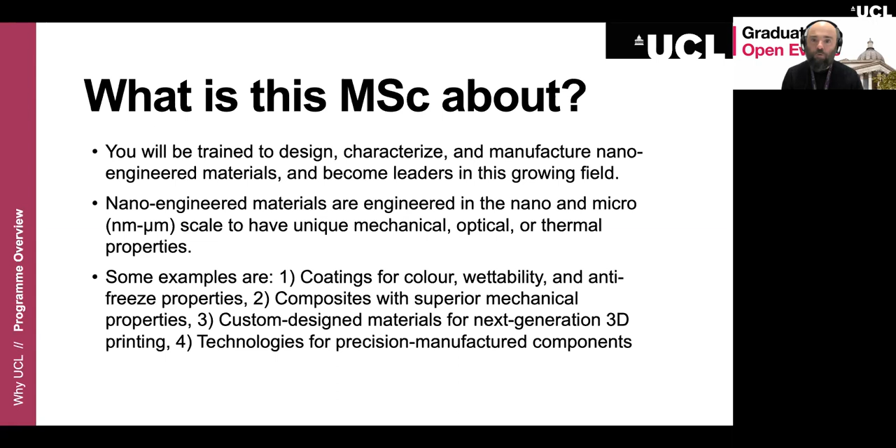To give you some examples focusing your attention on what they are, we will teach you about how to design coatings, for example, for color or wettability or antifreeze properties, anti-fogging properties, and so on. We'll train you to design composite materials with unique mechanical properties, very high strength, very high stiffness, for example. Other things would be custom design materials for 3D printing and additive manufacturing, and technologies for precision manufactured components. So all of these fall within this category of materials that are engineered in the nanoscale.

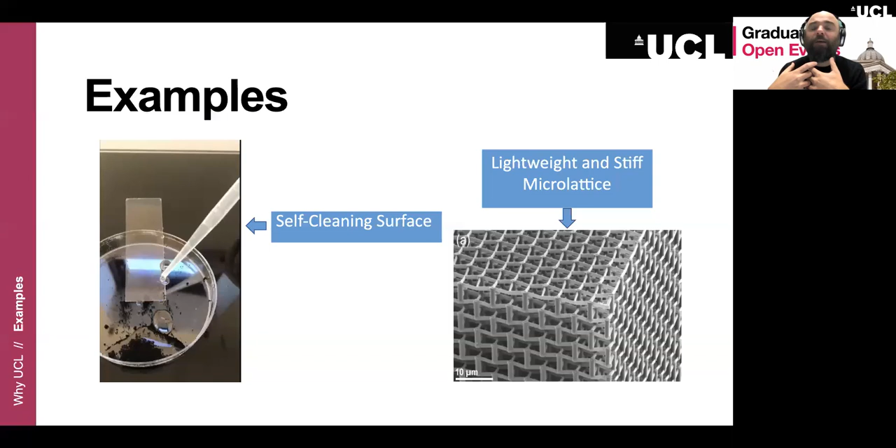The idea is that if you engineer the surface in such a way that you make these micro hills, essentially, you don't make the droplets spread out like this, but you let them be intact and roll. If you imagine this is a dirty surface and the droplets are rain, for example, it's simply a coating that can be applied on walls and all kinds of surfaces so that it can become a self-cleaning surface - it just cleans itself from any type of liquid. So that's one type of material.

On the right-hand side, you see a very small lattice. This is essentially an engineered material where we put the material where it mostly matters. In other words, it's a very tiny bridge, very lightweight - the material is designed to be where it can resist the forces. So essentially, you make a very lightweight and very strong or very stiff material by engineering these features at that very small scale that you see there. So just some examples to make you situate what nano-engineered materials are.

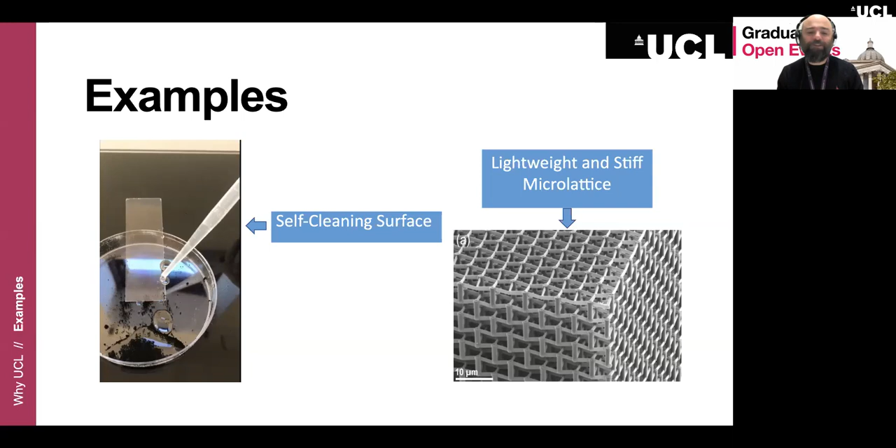And then in term 3, we have the advanced research project. This is term 3 in summer. And here you will be working on, as the title suggests, advanced research projects. I will describe a bit more later on about the types of projects that you will be working on. So that is the structure of the program. Okay, all of this is done in 1 year.

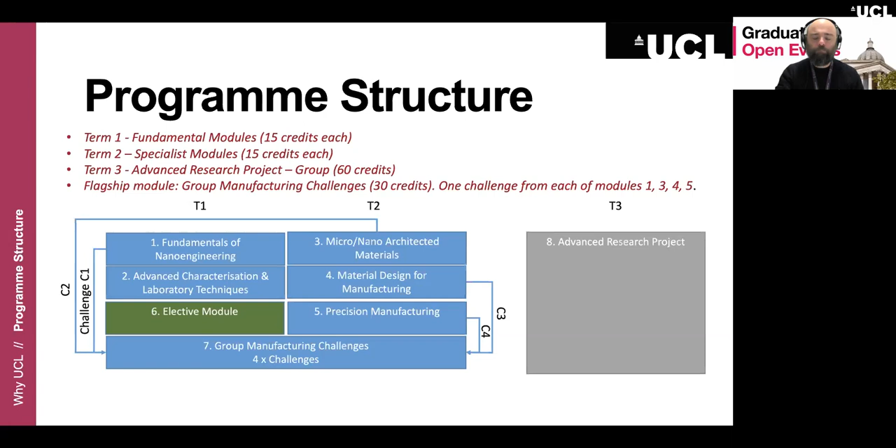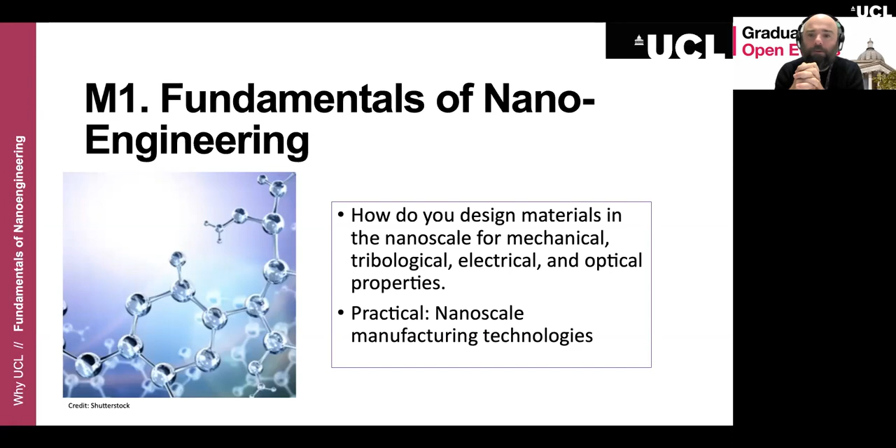Let me just take you very briefly through all of the modules. The first one is Fundamentals of Nanoengineering, and this module is about how you are able to design materials in the nanoscale for desirable mechanical, electrical, and tribological properties. Tribology essentially means friction, and tribological properties that are desirable are surfaces that don't wear with friction. For example, in the automotive industry, aerospace industry, and so on, they want surfaces that will just stay intact from continuous contact. There is a practical element in this module, and it has to do with training you on how to make these materials, so nanoscale manufacturing technologies.

The second module, also a fundamental module, is advanced characterization techniques. This module is about teaching you how to see and test materials. So you would want, for example, to test the mechanical properties of materials, indentation, hardness, and tension. You could want to see the microstructure or the subsurface analysis. You might want to analyze your materials and structures for chemical composition. You might want to, for example, measure the surface quality of a part that you have made. And we teach you all of these techniques here in this module. And all of these are practical. In other words, you go into the workshop, you go into the lab, and actually manipulate and use all of these machines so that you can get practical experience in them.

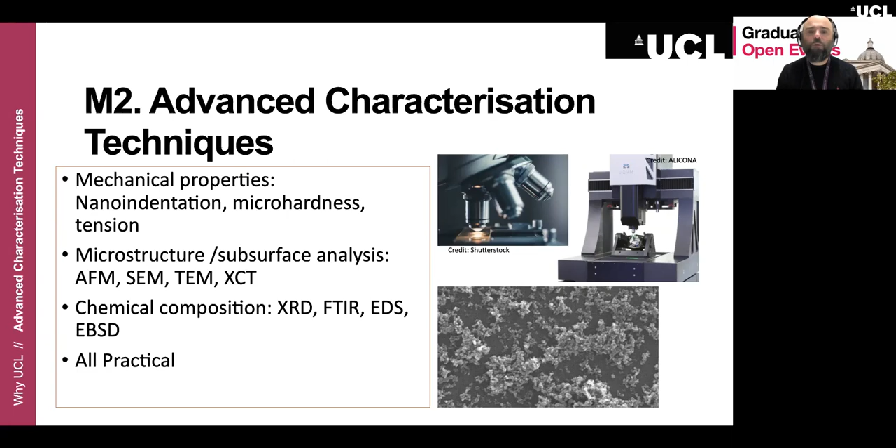Then we go into the modules that are more specific to the program. One is nano and micro-architected materials. These types of materials, I described them a little bit earlier, but they are of two types. They are either nature-inspired materials that are very efficient, and think here about materials that are super strong, like the shell of nacre, for example, of many mollusks, that is very, very strong, right? And it is so strong because it has some very special architecture in the micro nanoscale. So that's one kind of material.

And the other kind of material is something that is specifically engineered to have a property that is not found in natural materials. I go back to this little lattice that I showed you here. If you can imagine squishing this lattice, compressing it, you will see that these curvy struts actually bend. And what they do is make this material contract when you compress it. And if you stretch it, it does the opposite - it becomes larger this way. This is unusual among natural materials. Typically, when you stretch something, it thins, and when you compress it, it expands. And the reason why something unnatural like this is desirable is because it's very good for absorbing energy.

So this has already been applied in practice for soles of running shoes, where, for example, when you hit your foot on the floor, it absorbs more energy because it just takes all of that energy and contracts. And then when you release your foot, it expands and gives you back that energy. So it makes it easier to run. Just an example on that. And what we will be talking about in this module is how do you design such material, how do you do structural analysis on them, and how do you manufacture them.

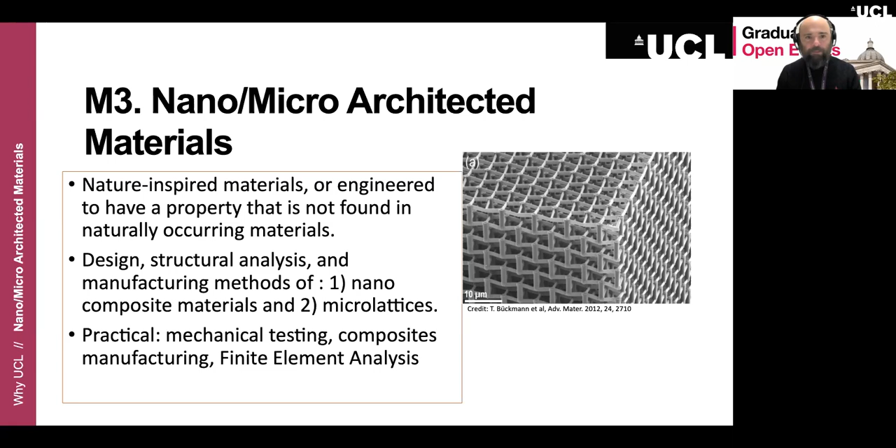Then we have a module on material design for manufacturing. This has to do with enabling you to design new materials that don't exist yet, but that will be needed in the future. You do case studies on how manufacturing in the future needs new materials, and you design some unique and novel materials here. There's a practical part too, involving computational modeling techniques to design and drive these new materials.

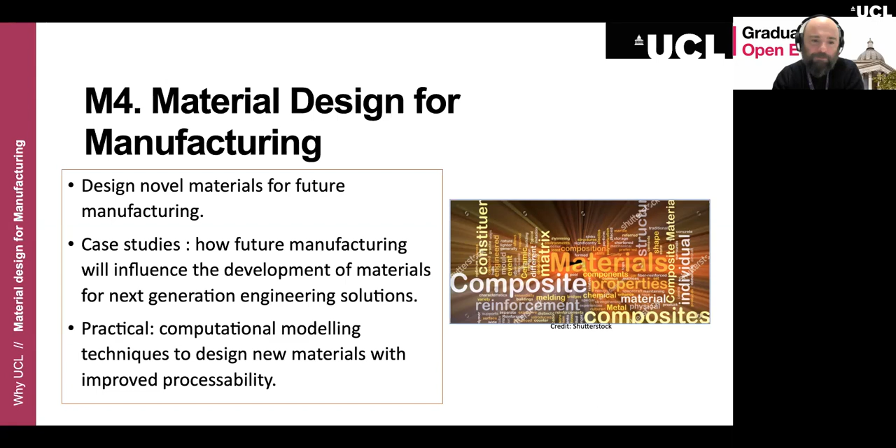The last technical module is precision manufacturing. This has to do with making components at the nano and micro scale. You'll learn about methods in additive and subtractive manufacturing technologies, machine tool requirements, consumer needs, and applications - this is very industry driven, so you'll learn current industry practices. Crucially, in this module you get practical hands-on experience with high precision CNC machining and surface measurement.

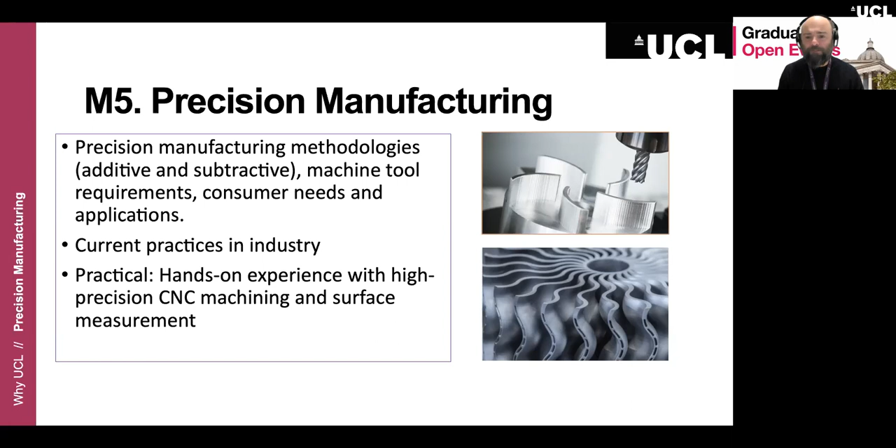So you see that all of these modules we teach have some practical focus, so you don't just learn the theory but actually put it into practice. But where you really put theory into practice is the module I mentioned earlier on manufacturing challenges. Essentially, what we do here is help you learn the technical content by actually making something yourself.

We have 4 challenges of about 5 weeks each. All of them are industry sponsored, and they tackle something new, or something that is a challenge to manufacture - something that in the next 5 or 10 years might be very big, but at the moment has challenges you can really think about solving.

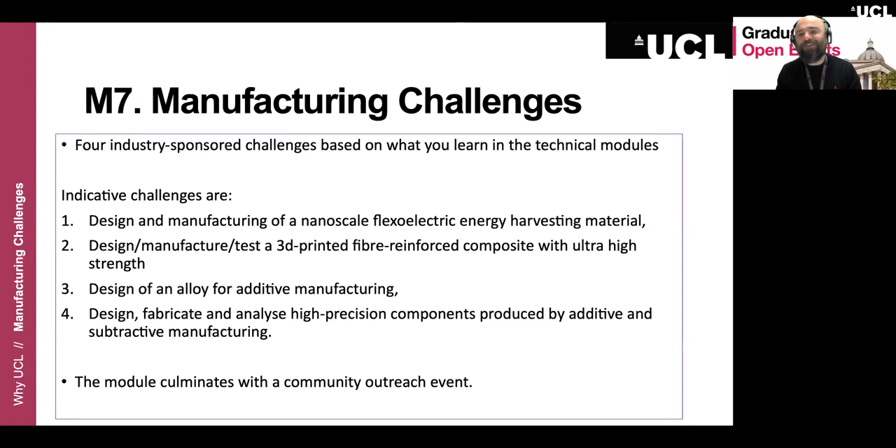For example, some indicative challenges: how to design and manufacture a nanoscale flexoelectric energy harvesting material. Lots of words in here - this type of material, when you press it, produces and stores energy. Could be good to get energy when you're walking on the floor, for example. Flexoelectric means it flexes and harvests energy more specifically.

Another could be to design and manufacture a 3D printed fiber reinforced material with ultra high strength for an automotive component. Another challenge is designing a new alloy or material for additive manufacturing. And one more could be to design, fabricate, and analyze high precision components, measuring how precise they are and what surface tolerance they have, in both additive (3D printed) or subtractive manufacturing (machining).

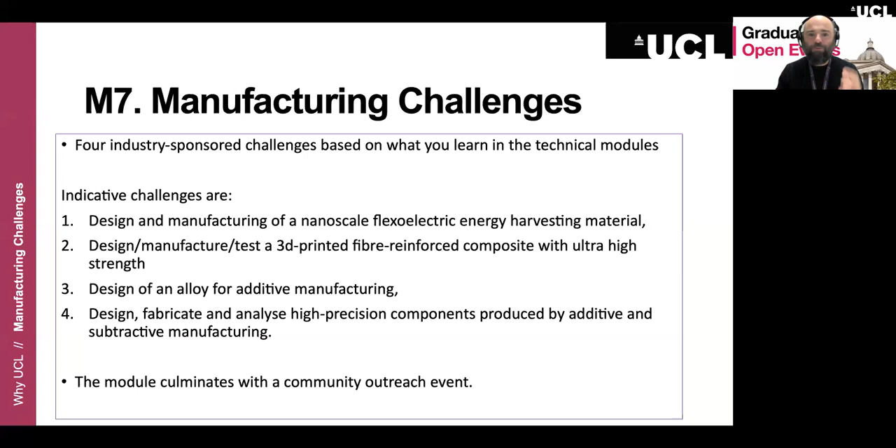Finally, we culminate this module with a community outreach event. We have a presentation where you can interact with local and national industries and present your results to all of them. So these are the modules that are taught.

Then during the summer, there is an advanced research project. Here you work in small teams of typically 2 to 3 students on an advanced research topic. Generally these topics are new, unsolved, and exciting, proposed typically by industry, but some also by our academics. The idea is to replicate the settings of working in research and development for a big company. You'd work with your small team, have your objectives, and over this 5-month project work together to complete the research project.

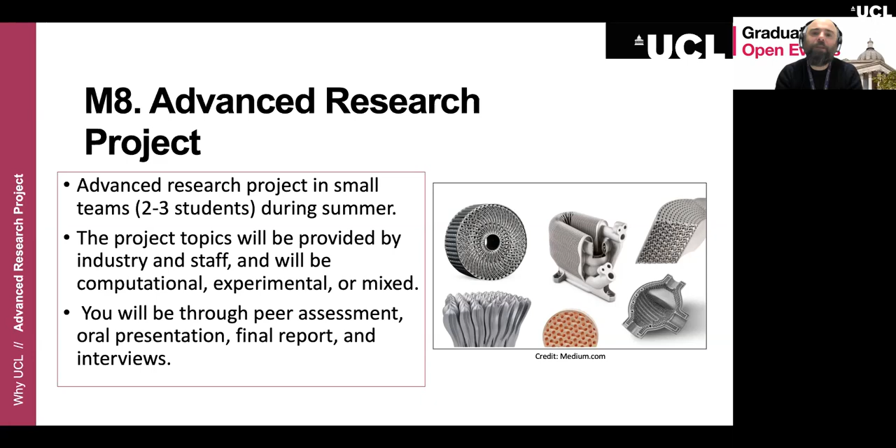Okay, and then there is this elective modules. There are many modules possible to take, and the objective of this module is to extend your knowledge on something that gives a flavor to your degree, something that either really interests you or something that you're curious about.

It could be something technical, like sustainability, digital materials manufacturing, materials chemistry, nature-inspired materials engineering, or it could be something more socially forward, for example entrepreneurship, social justice, or innovation for a fairer world. There are many of these modules.

All right, so that is the structure of the program. I hope I've clarified essentially what the teaching would be like. I wanted to close this with a bit of justification and motivation about why this program.

What we want to do with this is something that we have heard from industry is needed. Essentially, industry needs this toolset that is very valuable in students who have hands-on experience, and this experience should be industry relevant, generally about designing, making, and characterizing material at the micro and nanoscale.

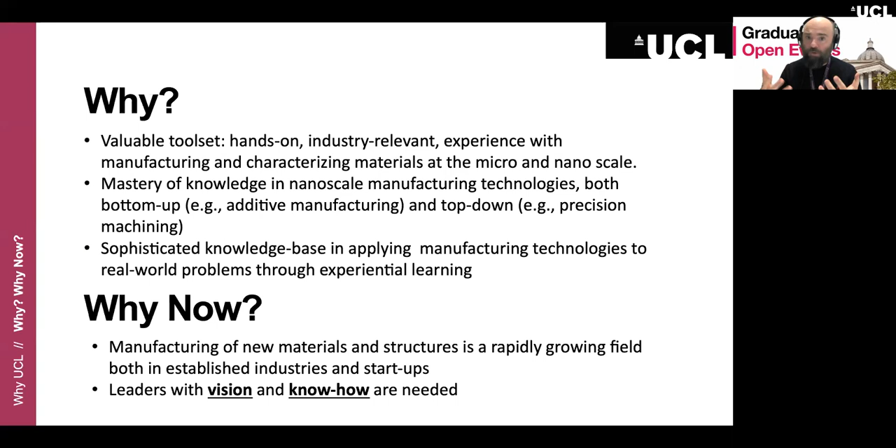This industry needs leaders. It needs leaders with vision about what is coming in the future, and also the practical know-how. That's why we are launching it now, and that's what we want to give you essentially as a toolset.

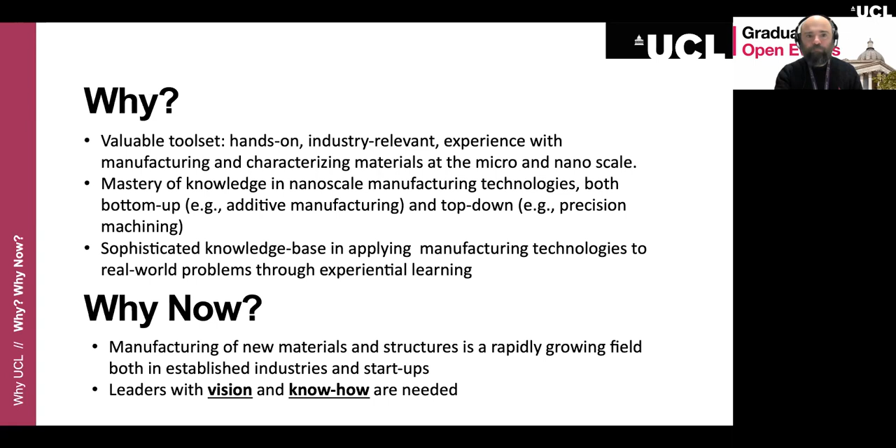So then what is in it for you? What do you get from this? You get some demonstrated skills. In other words, in your CV, for the next stage in your life and employment, you will have evidenced practice in creating solutions to challenges, making prototypes, and assessing how well they work.

You will get general knowledge applicable to many types of industries on how to manufacture materials and structures, and you will also get very specialist knowledge on high precision manufacturing and nanoscale engineering. There is large industry growth in aerospace and automotive, energy, and sustainable manufacturing. All of these industries need people who know about these things and have hands-on knowledge and practice on how manufacturing technologies operate. That's what you will get in the end.

But there is something more that is also as important as the technical know-how. You are at a stage where you will need to not just learn, but also live, right? So you need to be inspired, and you really need to like what you're doing and think about where the future is taking you. So this has to do with inspiration. How inspired will you be by what you learn and what you do, really?

This MSc will be at our new campus at UCL East, where essentially you will need to be immersed in the local culture of UCL East. You will live, you will learn, you will be inspired by this new campus. You will see brand new buildings, labs with a lot of light. Generally, East London is a very creative and vibrant place, full of startups, for example, full of people who will be just like you, who will think about the future and who will want to influence the future.

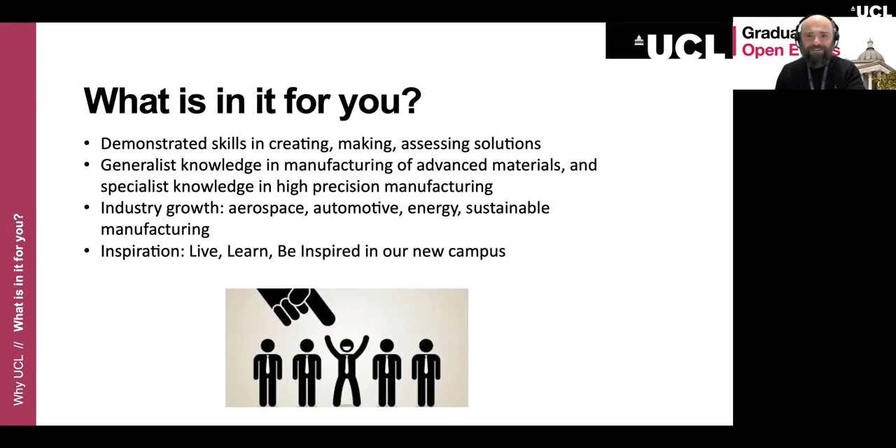Right, so that is a brief nutshell, just an explanation about what the program will be about.